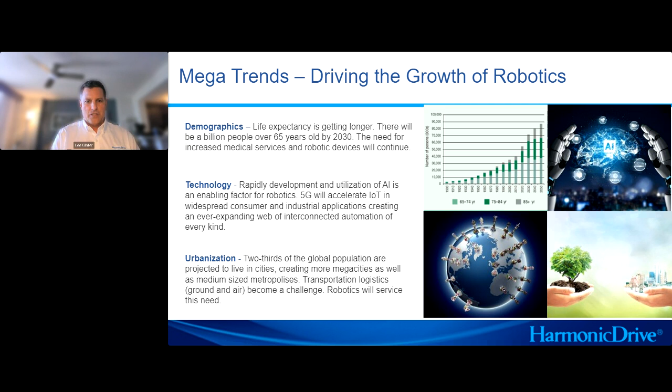And 5G will help accelerate Internet of Things and widespread consumer and industrial applications. The last mega trend we see is urbanization: 2/3 of the global population are projected to live in cities, creating more mega cities as well as medium-sized metropolises. So transportation and logistics, ground and air, become a challenge. And robotics will, I think, help serve this need.

So with all this robotics growth that's forecasted, there's many studies out there showing the short-term and long-term growth, but the need is for precision motion control. One such report that we pulled up shows a compound annual growth rate of about 16% between now, 2024, and 2029. So if the market size is about 45 or 46 billion now, it's projected to get up towards 100 billion by 2029. That's a pretty aggressive growth. This one study showed the fastest growing market is North America. So that's interesting to know.

And Harmonic Drive, along with all the other robotic suppliers, are going to have to support that fast growth. The largest market is still Asia Pacific, according to this. And here's some of the big industrial robot players: Fanuc, Kuka, Yaskawa, ABB, Denso, and there's obviously many others. The use of robotics in every industry is increasing, demonstrated by this aggressive growth year over year. And due to the demand and adoption of robotics technologies across automotive, healthcare, logistics, and manufacturing, that's where a lot of this demand will come from.

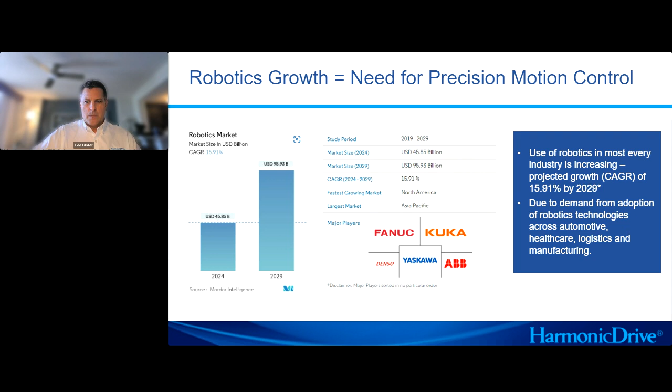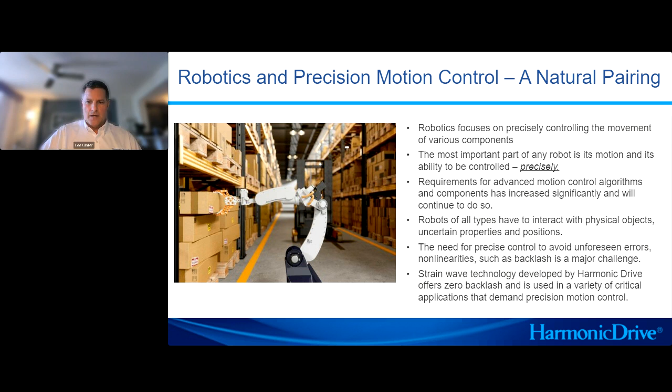All right. So why are robotics and precision motion control a natural pairing, hand in hand? A lot of this is pretty straightforward and obvious, but robotics focuses on precision, controlling the movement of various components. The most important part of any robot is its motion and its ability to be controlled precisely. Requirements for advanced motion control algorithms and components have increased significantly and will continue to do so. Robots of all types have to interact with physical objects with uncertain properties and positions; the need for precise control to avoid unforeseen errors, such as backlash, is a major challenge. And last but not least, strain wave technology, developed by Harmonic Drive, offers zero backlash and is used in a variety of critical applications for precise motion control.

So now we'll get into the strain wave gearing technology, what it is, how it works. I have a few slides on that, and then we'll have a video shortly after that to show how these three main components interact.

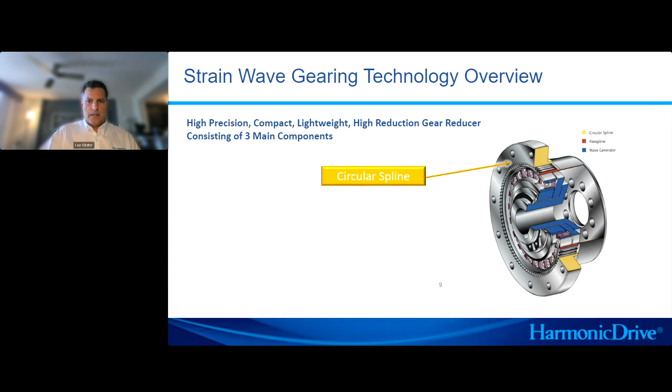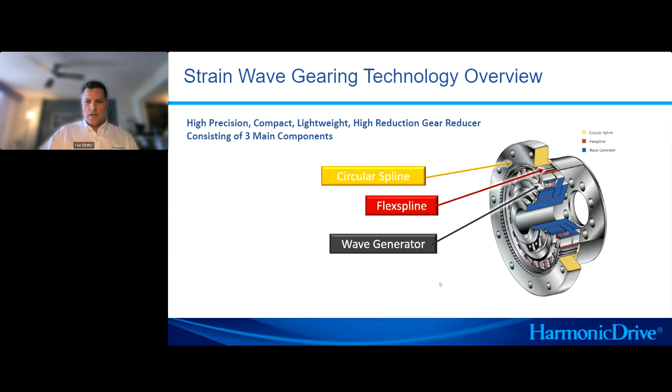The first element of our harmonic or our strain wave gear is the circular spline. The second element is the flex spline, and the third element is what is known as a wave generator. The wave generator is essentially an elliptical steel plug with a special thin race bearing wrapped around it. So when that bearing is inserted on top of this elliptical shape, it conforms to the shape of the ellipse. And that's the critical driving element of a strain wave gear.

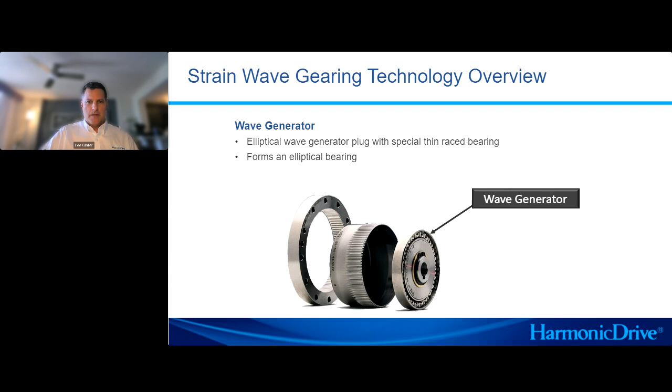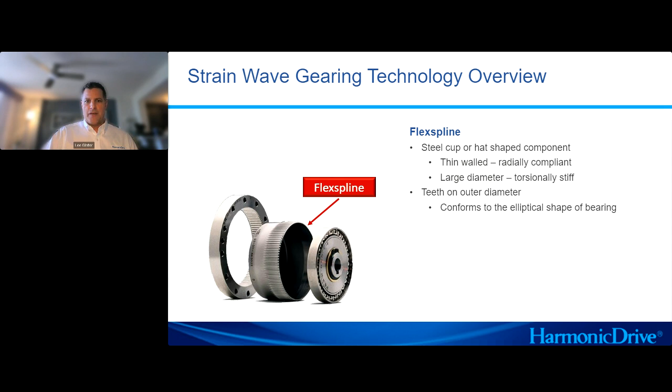The flex spline is essentially either a steel cup or a hat shape, thin wall steel cup with gear teeth on the outside of it. The cup is torsionally rigid but radially compliant. So there's teeth on the outer rim, on the outer diameter, and when the wave generator is inserted inside the cup, this thin wall, flexible cup now conforms to the shape of the ellipse.

And then the final element is what we call the circular spline. It's a rigid circular ring with teeth on the ID. And the number of teeth on the circular spline are 2 more than the flex spline. And so basically, when all these 3 parts engage, you'll have a minor and major axis of engagement, and at any given time, there will be over 30% of the teeth completely engaged.

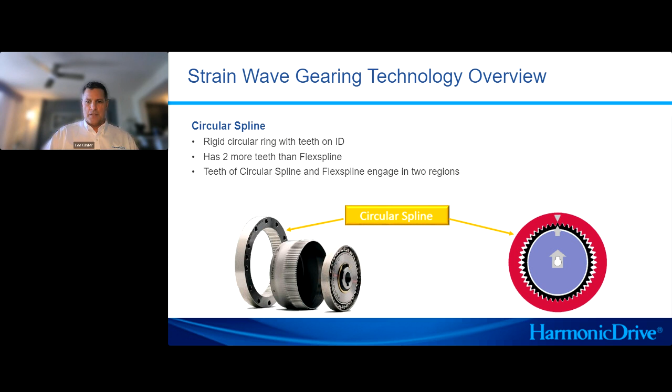And let's just talk about some of the features and benefits. Then after this, there'll be a video where you can see how the interaction of all those 3 components work. So features, benefits: Harmonic gear is inherently zero backlash, and it has high positional accuracy. Positional accuracy is typically less than 60 arc seconds, with repeatability of plus or minus 5 arc seconds. So very high repeatability. It's compact, and that compactness gives it high torque density.

It's inline configuration with hollow shaft capability. The Harmonic drive is inherently a high reduction ratio, and those ratios vary from 30:1 for some of the smaller sizes and go up to 160:1 ratio, all in a single stage. And no matter what ratio is applicable for an application, the size of the Harmonic gear remains constant. It's just the number of teeth on the flex spline and circular spline that change the ratio.

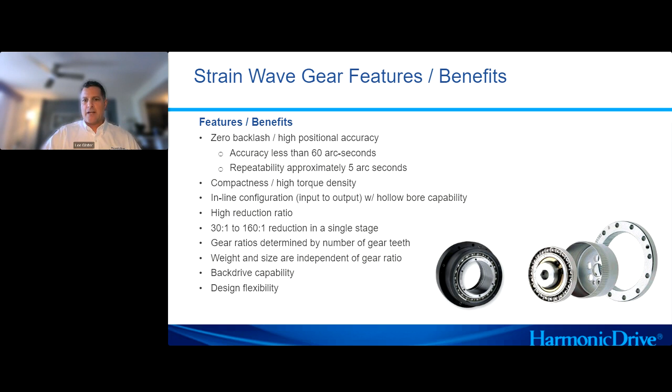The strain wave gear inherently has backdrive capability, and that backdrive torque is published. And the most important thing, and we'll talk about that a little bit later in the presentation, is the strain wave gear also has design flexibility to meet each designer's performance, accuracy requirements, and dimensional requirements.

So next, I'm just going to play a quick little video to show you. Sometimes it's easier to see how these 3 parts interact. It's very unique technology. So let's play the video.

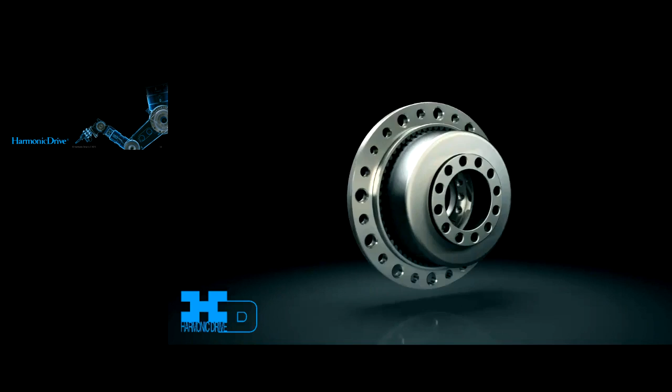High-precision, zero-backlash harmonic drive gear component sets are key to the performance of our gearheads and servo actuators. Harmonic drive component sets consist of only 3 precision components: wave generator, flex spline, and circular spline. The wave generator is the driving or input element of the transmission. A hub having an elliptical shape is fitted within a special thin raced ball bearing to create the wave generator. The flex spline is a robust, torsionally stiff, yet radially compliant component with external gear teeth, capable of reliably transmitting high torque loads. The circular spline is a rigid ring with internal gear teeth. The circular spline has 2 more teeth than the flex spline.

When inserting the wave generator, the flex spline conforms to the elliptical shape of the wave generator. Rotating the wave generator creates an advancing waveform on the flex spline. When assembled with the circular spline, tooth engagement occurs at each end of the major axis of the ellipse, and up to 30% of the total number of gear teeth are simultaneously engaged. The rotation of the wave generator causes the flex spline and circular spline tooth mesh to move around the circumference. Since the flex spline has 2 less teeth than the circular spline, rotation of the wave generator leads to a relative movement between the flex spline and the circular spline. Harmonic drive component sets, gear heads, and servo actuators are used wherever zero backlash, extreme precision, and high reliability motion control is required. Harmonic Drive, advancing the technology of motion control through innovation.

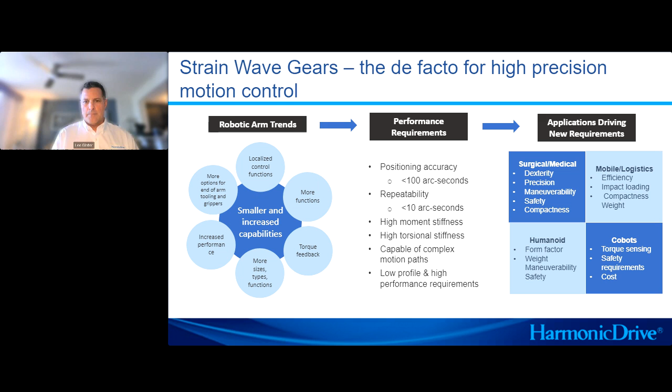Another big application that is getting a lot of publicity now are humanoids. Some of their requirements are form factor and weight, maneuverability, safety. And the cobots have been around for a while, and that market continues to grow as well. Torque sensing, safety requirements, cost. So a lot of these have similar demands and requirements. And strain wave gearing typically is a great solution and meets many of these requirements.

So talking about gearing variations, there are many form factors of a strain wave gear, and a lot of these different form factors really come down to the designer of the robotic joint. What are the resultant design requirements? Does that designer have physical constraints: dimensional, weight, inertia? Do they have some performance requirements: accuracy, repeatability, dynamic response?

And what kind of life requirements: duty cycle, e-stop capability, mean time between failure. And then the last one's environmental as well. Are there any temperature concerns, corrosion resistance? Is this going to be in a vacuum? Are there certain IP ratings? So strain wave gears need to be able to adapt to a lot of these design requirements that these robotic joints will have. So there's many different form factors to help meet those. And within each form factor, they can be modified slightly or significantly depending on what the application requires.

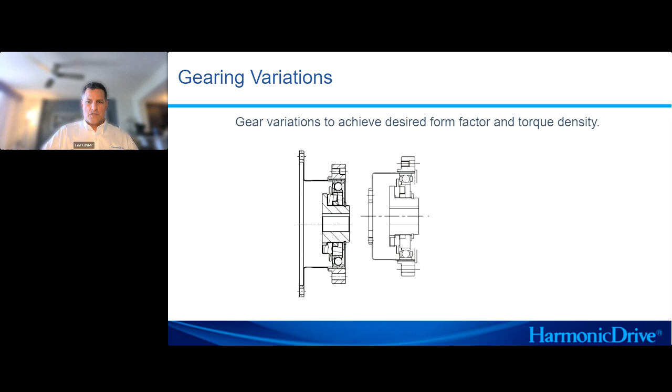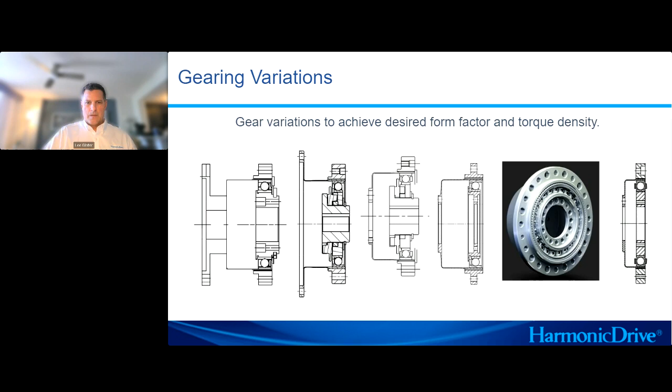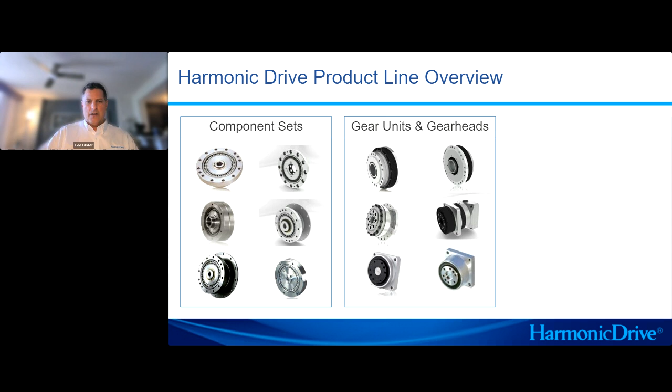If the footprint or the overall dimension flexibility is not that critical, it might make sense to look at a pre-engineered, what we call gear unit. And the gear unit is basically a component set in a housing with an integrated output bearing, which is typically a cross roller bearing. So this gives a compact, completely housed gear unit or gear head that can be dropped right into the application.

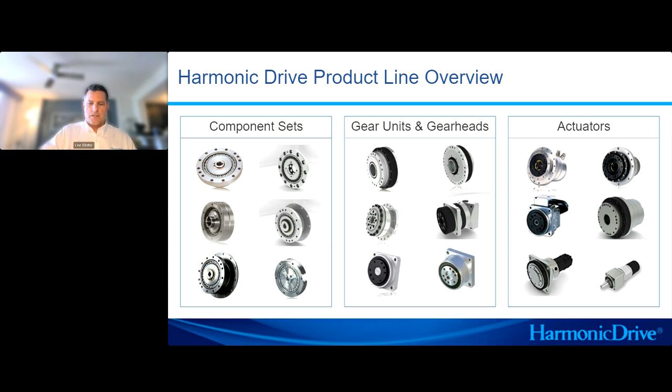And then the higher level design would be what we call an actuator, and this would incorporate our harmonic strain wave gear, a servo motor, an encoder, an output bearing support, and in some cases an integrated drive built into the back. So these actuators have less flexibility than these other groups, but if the performance and the footprint meet an application, all the engineering's done already. So these are excellent choices for applications as well.

In the next couple of slides, we're going to go over some design trends I've personally seen, specifically for some of these newer robotic markets like humanoids and cobots. We've seen requests and requirements for lightweight. Everything needs to be lighter weight. Specifically, if we're talking about a humanoid design, those are typically battery powered, and lightweight helps preserve battery life and allows torque to be reduced at the extremities, which saves on battery life.

I'm showing here an example of a lightweight component set that we have. It's called our CSG series, and essentially it's 30% lighter than our standard component set. That's significant weight savings, and it has the same performance as a standard unit. There is a large hollow bore option available with it too. This particular product comes with two options: a standard flex spline bore, and a larger, what we call a big bore option.

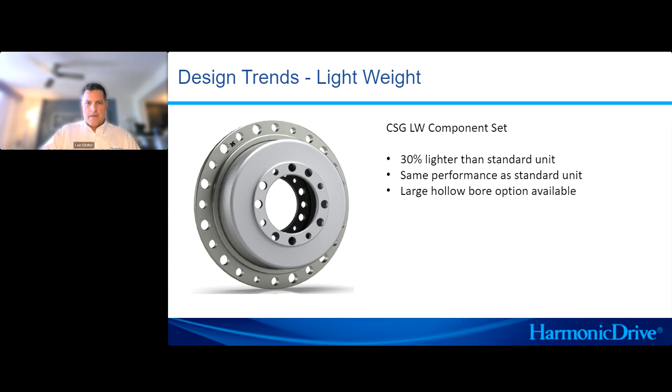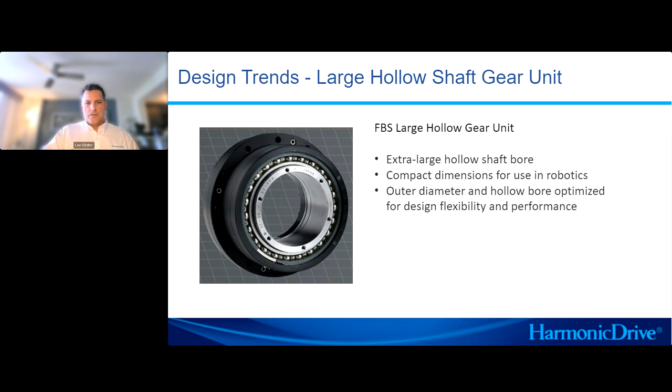The next trend that we see is large hollow shaft gears. This particular unit is a gear unit, so it's a component set that has a housing and an output bearing. You can see here the hollow bore. The difference between the OD of this gear unit and the ID is very compact. The applications we've seen are a lot of end of arm tooling where you need to pass cables, pneumatic tubing, sensor wires. This product line allows some flexibility and some cable management as well.

The last trend that we see is integrated servo drive. This product line is our standard servo actuator, but we've integrated a servo drive into the back of it. Currently the communication interface is CANopen, but we are working on EtherCAT and expect to release that shortly. So you have all the attributes of our standard servo actuator, but you don't have to worry about running cables out to a separate amplifier. We've also added a dual absolute encoder to the system.

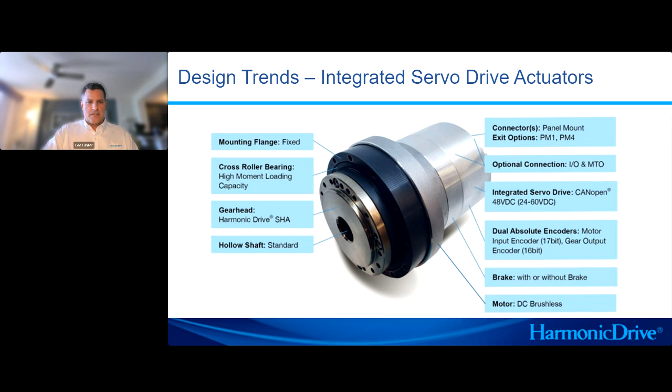That's pretty much it for that, and I think that might even be the end of the presentation.